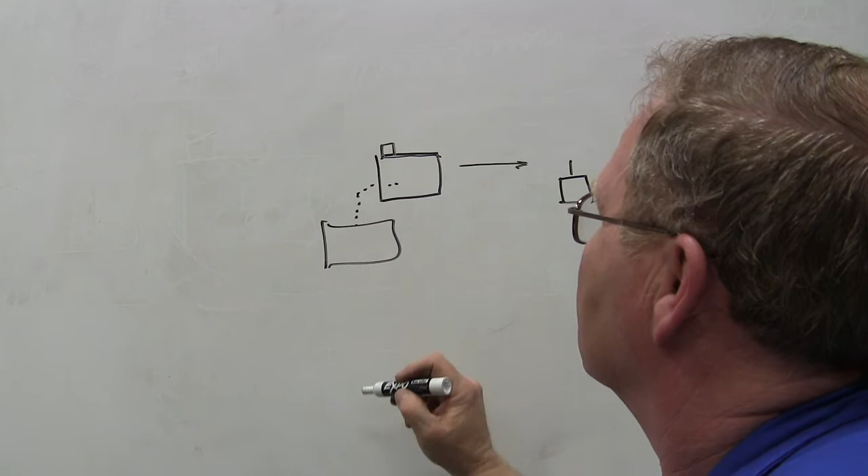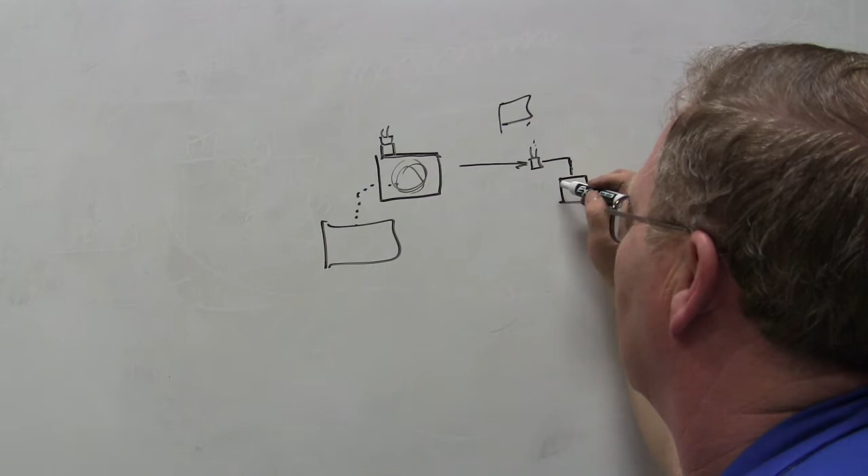In here you've got a little solenoid valve, and right here you got a little solenoid valve. And that solenoid valve, when the PCM operates it, opens it up, and usually it'll do it going tick, tick, tick, tick. It doesn't just open it up solid, it goes tick, tick, tick, tick. It's got a pulse width so it can vary the amount of purge.

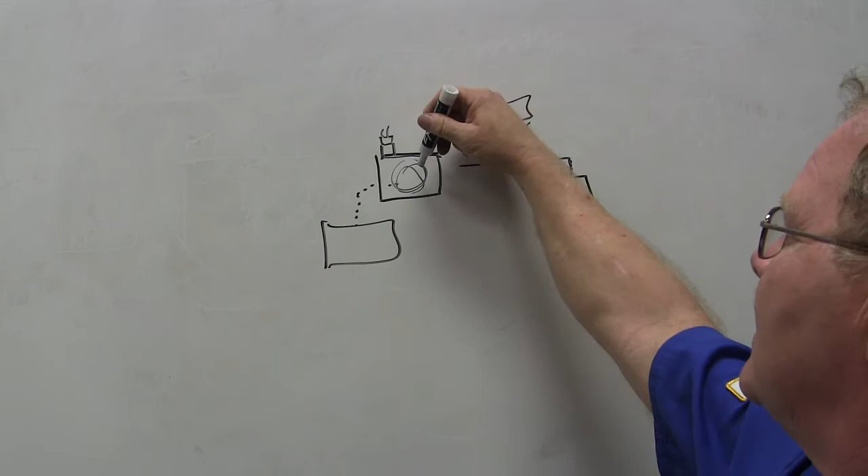It's going to pull these gasoline vapors that came through this line into the engine and process them and burn them so they never see the light of day, right? All right, now this is ultra simplified.

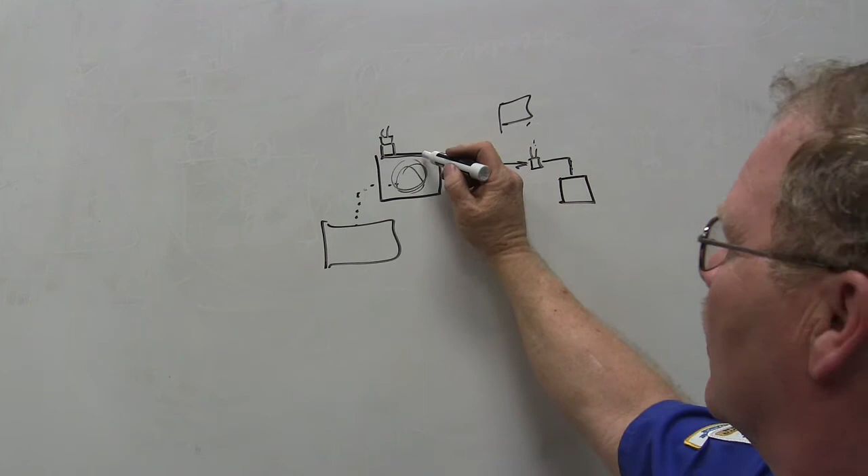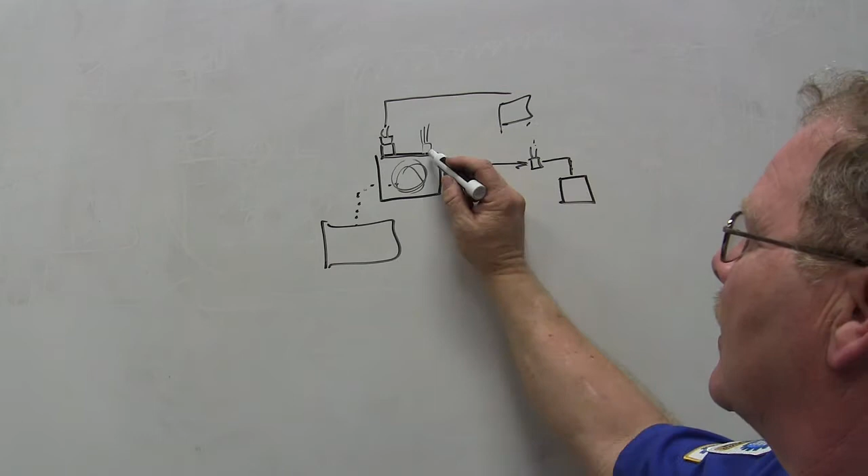Also in here we've got a pressure sensor in the gas tank. Occasionally the PCM wants to close this and reduce the pressure in the gas tank. This one's normally closed, this one's normally open. So it closes that one, opens that one, then closes that one, and it traps that little bit of vacuum in the gas tank -- it's a tiny little bit, not very much.

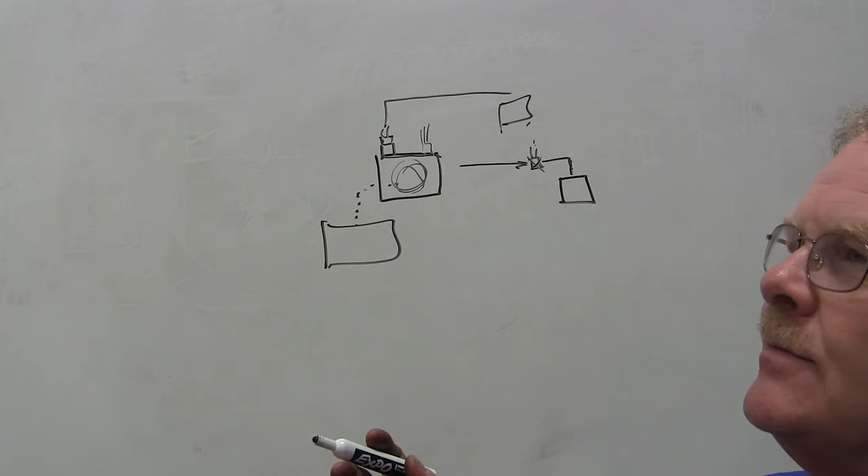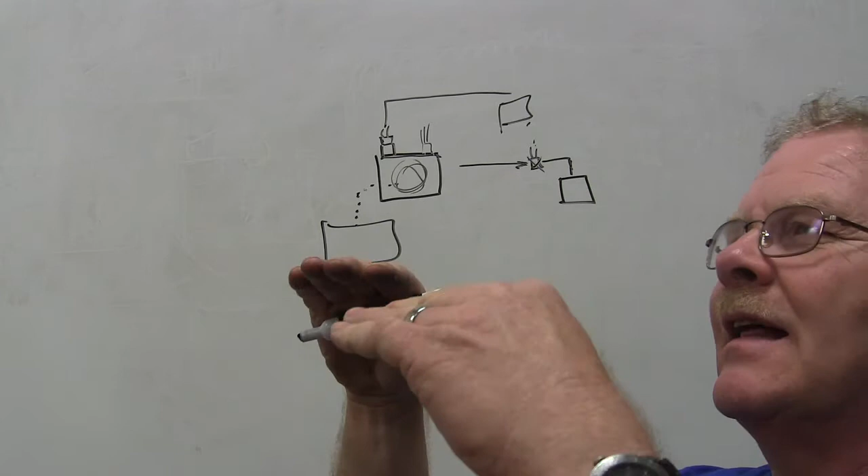It doesn't do this unless you're parked, typically. Sometimes it'll do it whenever you're between 50 and 85% gas when you're driving. Depends on the system, everybody's a little bit different. There's also natural vacuum NVLD systems that just depend on the gas cooling down to reduce the pressure in the tank and open a switch. That's a different deal. One way or another, this valve is going to be closed only when the PCM is checking to see if there's a leak.

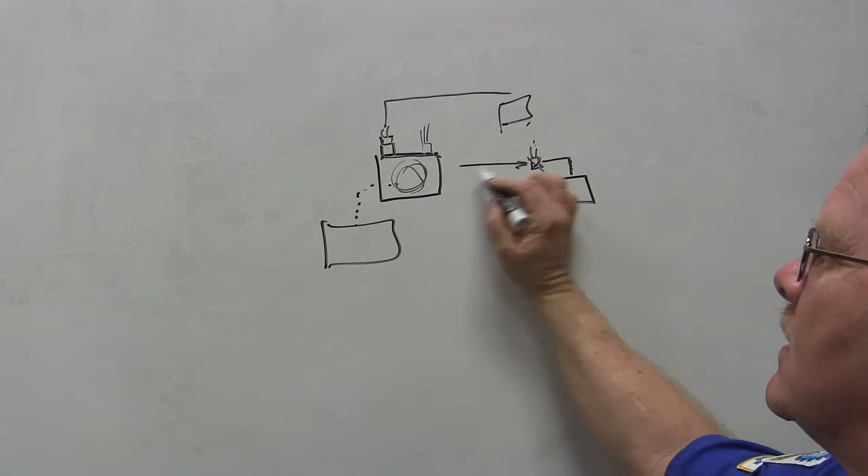All right, this pressure sensor -- let's watch this. Let's draw a graph here. What if the pressure sensor did this, and then it leveled out whenever this thing stopped?

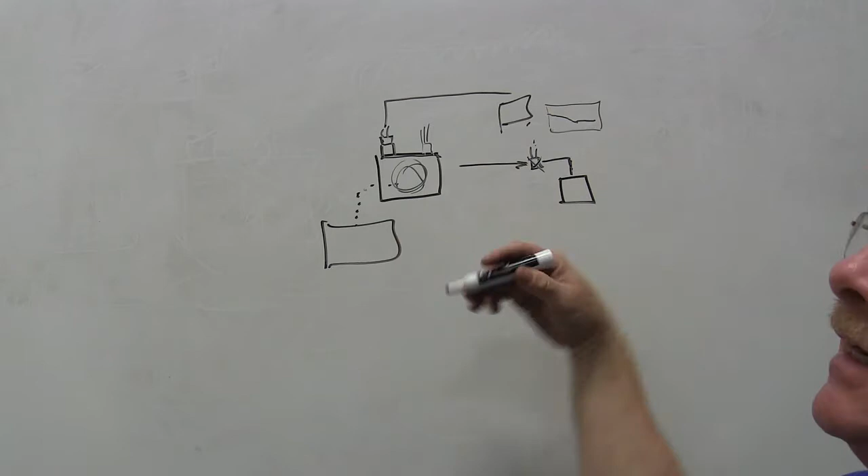Now you got leak detection pumps on some of the Chryslers and all this. There's a bunch of different ways this thing works. So we're going to assume we're doing the one with the engine running.

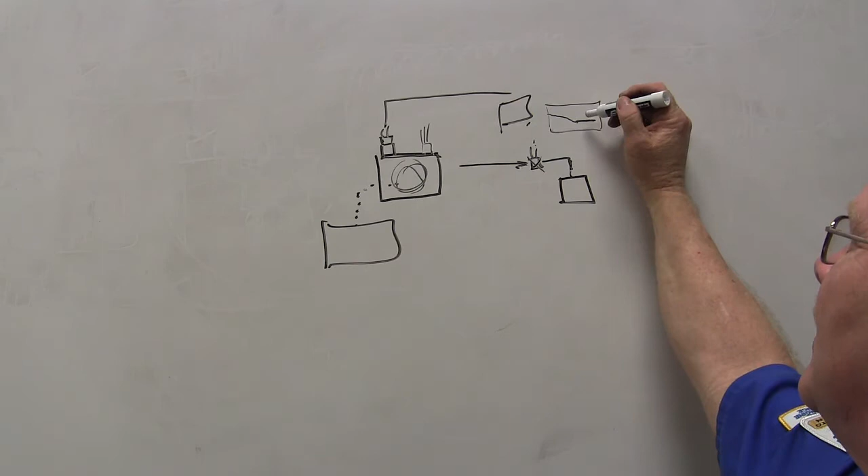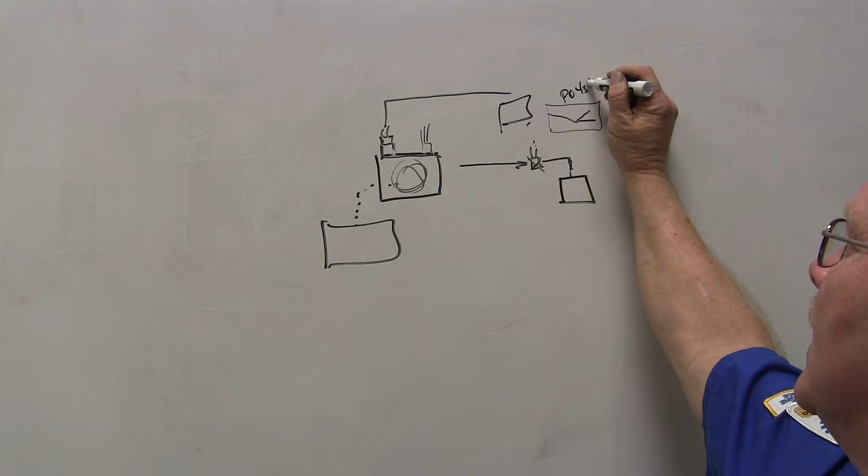All right, this right here is supposed to hold. It's not supposed to leak back up. If it leaks back up, when it's holding this, measuring that, and holding that, after it has delivered a vacuum, if it leaks back up it knows it's got a leak, and it throws you a P0455 if it's a big leak. It'll throw different codes.

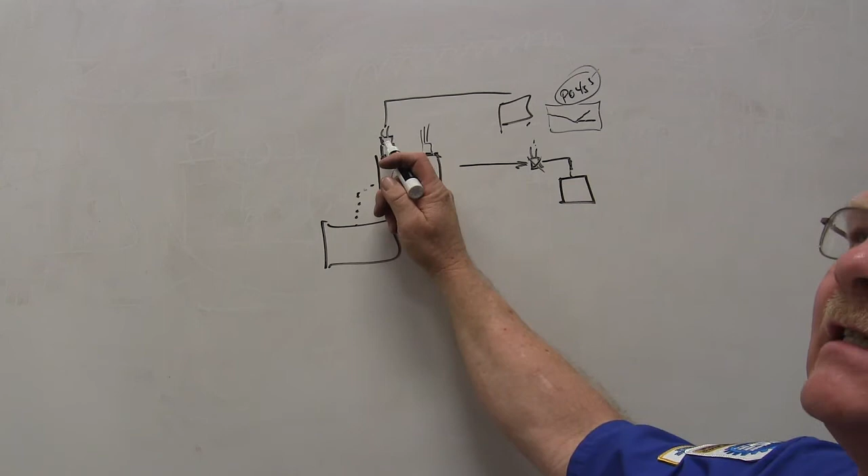Well, when it releases this, it expects it to go back up. If it doesn't, it throws you a code for that, because sometimes this gets clogged up with dust and stuff, or the canister itself might be. That's why most of your canisters nowadays have got a filter. But that vent right there, whenever air is pulling in, the air is coming in there and purging the canister. That's basically how that works.

Now, years ago, back in the way yonder, I think they started in the early 70s putting canisters on cars. I don't know exactly when it was, but the fact was I've seen them for eons, even when we had just carburetors. The old EVAP system only purged the canister when EGR was flowing. Then later on they started using a little solenoid to do that. So keep that in mind.

That's what EVAP is all about, right? Now, what is the significance of EVAP? It can cause drivability problems. We talked about that a little bit yesterday.

All of the following can increase the pressure in the evaporative system except: A, returned fuel from the fuel injection system; B, fuel temperature; C, volatility of the fuel; or D, inlet fuel to the fuel pump.

Returned fuel from the fuel injection system means you've got a fuel pressure regulator on the rail. Fuel goes up there, the excess pressure lifts that regulator off its seat, and pressure comes back to the tank.

Could that increase the pressure? Because it's going to be warmer when it goes back than it was when it went up, right? The fuel pump pushes it up there, it's kind of cool, it comes back warm, so that can increase the pressure, correct?

Okay, all right, and then what about fuel temperature? When fuel gets warmer, does it increase pressure?

Volatility of the fuel—if it's more volatile, we talked yesterday about Reid vapor pressure. If it's more volatile, is it going to be prone to increase pressure just because of the nature of it?

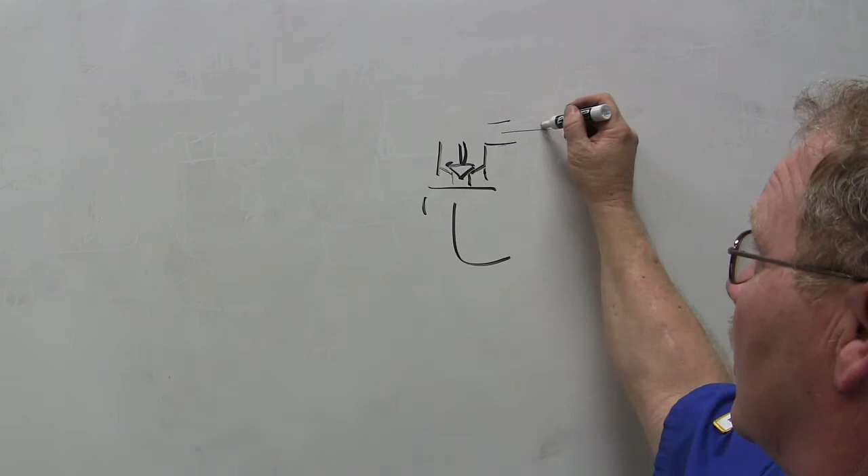Here's your EGR valve, here's the heart of it right here. You've got a seat right here, basically a hole, and you've got exhaust coming up here because you've got a pipe screwed on there, right? You have a pintle. You've got a diaphragm or a motor or whatever that opens that. When you open that, that exhaust is able to leave this pipe coming from the exhaust and go into the intake. But it's only supposed to happen when this valve is open.

Now then, you're the engineer. We need to know how we can tell if this EGR is flowing. I need to know how it's flowing, is it flowing or is it not? I don't think it is. No. How would you be able to tell? That's what I'm asking. You need a system.

You've got to design a system so that I'll know, I can hook it up to the car. In other words, I can type algorithms into my PCM. The PCM needs a feedback mechanism so it can tell if EGR is flowing or not. So how are you going to do it? A sensor? Huh, a sensor. Where are you going to put it?

Well, I know that, but what I'm trying to say is you've got to come up with a system. I'm talking about engineering. I know you've troubleshot an EGR before, yeah, but I'd say listen, underneath the EGR...

You're going underneath it. Okay, so here's our pipe right here. We got a pipe screwed onto this. I got to draw that better. All right, and that pipe, that exhaust is flowing up here.

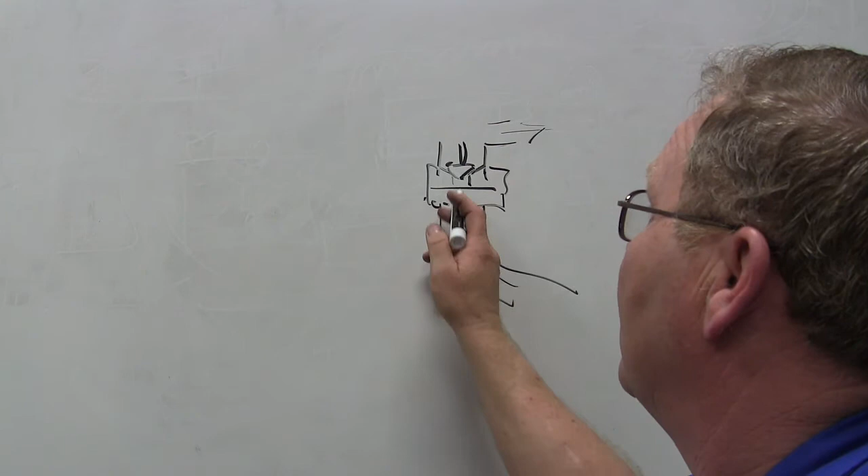So now, what are you going to have that sensor sensing? Is it oxygen, air, or the pressure coming up? Okay, so if this is closed, there's going to be pressure there all the time, isn't there? Okay, then above it. So we're measuring pressure above it.

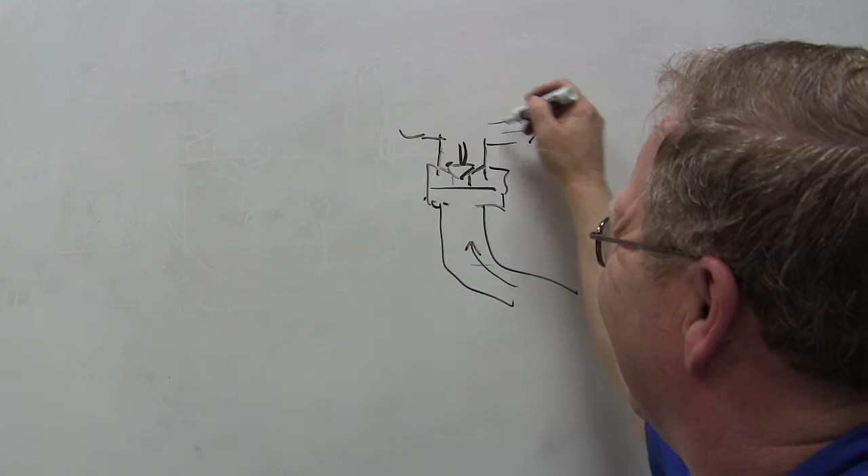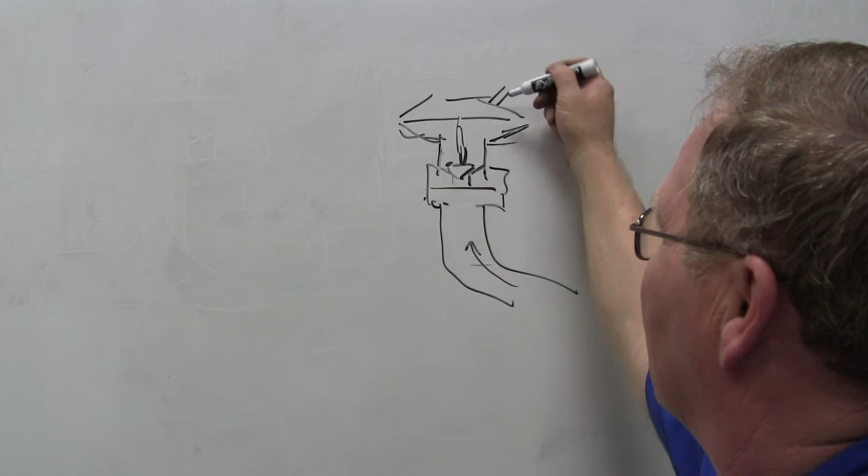So we're going to put, there's our diaphragm right there with a vacuum line hooked to it, if that's the way we're doing it. And this is going to be connected to the diaphragm. When low pressure comes in above the diaphragm, it raises the pintle off the seat. All right, so we're going to put a sensor right here, and we're going to put wires coming out of it, right? And this is going to be a sensor that reads pressure.

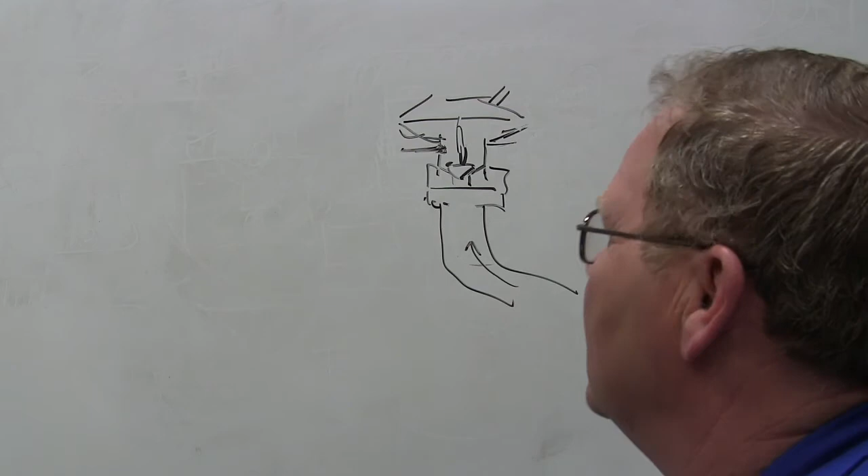We don't really have a lot of room. We can put one in there. It's got to be down here so that when the exhaust is flowing, it flows past it, right?

Now, on the Asian cars, they've done that, and what they use is a temperature sensor. So what happens, that exhaust is hot, right? So if you put a temperature sensor in here and it gets really hot, you can tell that EGR is flowing. If it doesn't get really hot, you can say, well, the EGR is not flowing, I'm going to turn on a code. I'm going to turn on a P0401.

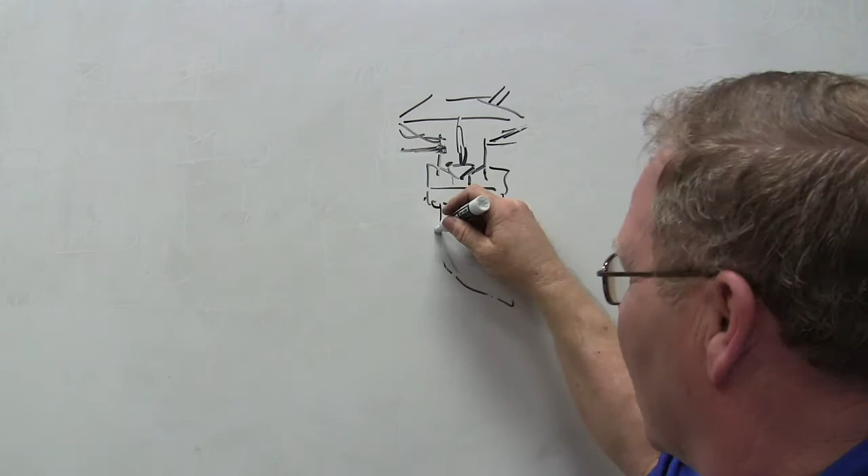Okay, now another way, I'll tell you how the Ford people do it. What about, let me ask you this. What does your oxygen sensor do when EGR is flowing? Wouldn't that be a good feedback? Is it going to change?

If you're watching that oxygen sensor real close, if you're the PCM, you're watching the oxygen sensor and say, I'm going to deliver a little EGR. I'm going to raise that pintle. I'm going to deliver some vacuum. I'm going to raise it up. And I'll be able to look at that oxygen sensor and tell if that thing's flowing. So what's the oxygen sensor sniffing?

Oxygen. You won't have as much oxygen, will you? Because you're displacing some of it with this inert gas. So you're going to probably see it drift up a little bit. I'm surmising. GM did that for years.

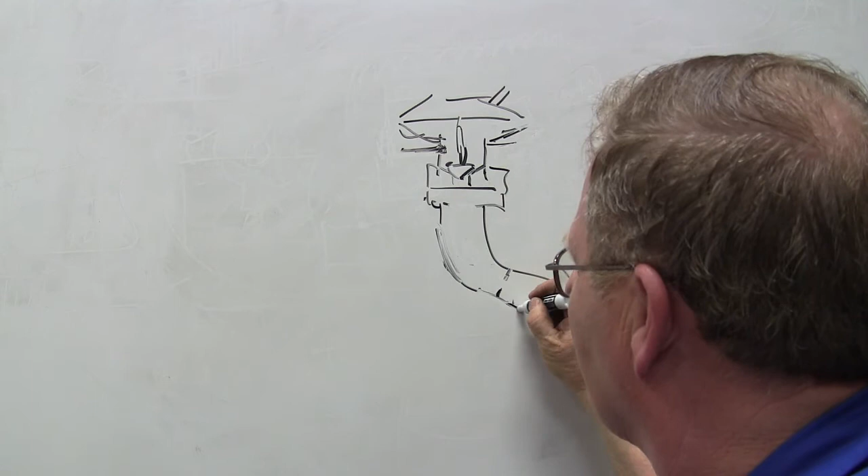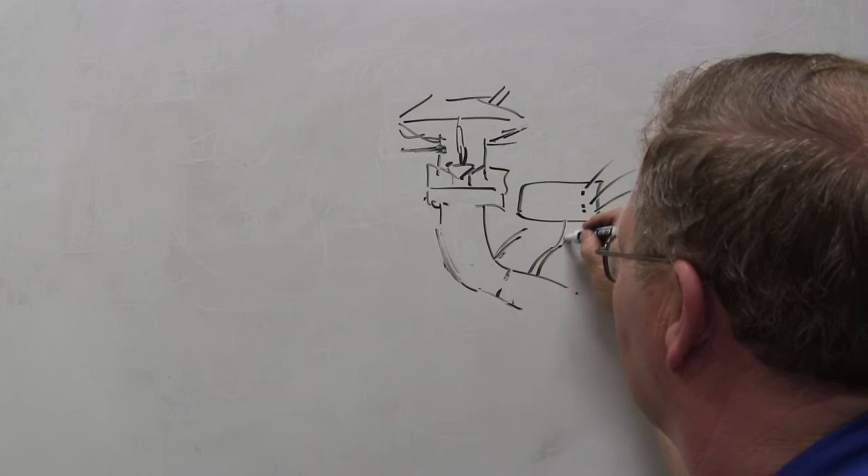All right, but Ford did this. Here's what Ford did. Ford took and put a little restrictor right here. And they put a hose right here and a hose right here going to a sensor with 3 wires to it: reference voltage, signal, and signal return. These hoses were 2 different sizes.

All right, when exhaust is flowing in this tube, what does the pressure here in front of this orifice do? Imagine yourself with 2 gauges connected to it. What does the pressure on this side of the orifice do? The engine is pushing exhaust up this way. What do you think it's going to do?

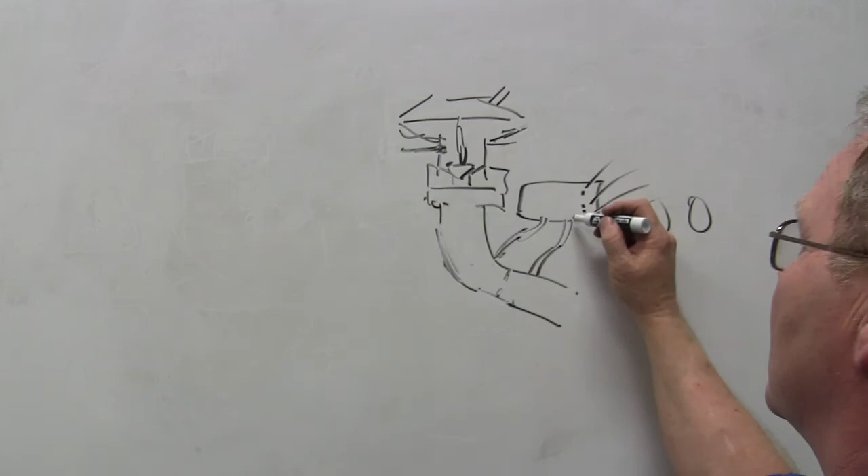What happens when you put your finger over the end of the hose? The hose gets tight, right? Okay, so this pressure on this side is going to go up, and the pressure beyond the orifice is going to go down. They call that a DPFE, delta pressure feedback EGR.

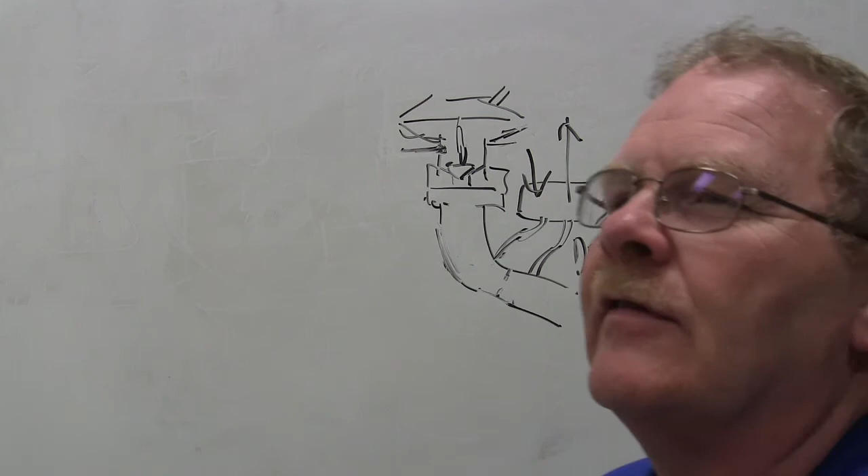If it doesn't see that change, it knows there's no exhaust flowing. If the passages are stopped up in the intake with crud, which a lot of the times they will be, then you won't have any kind of EGR flowing through there.

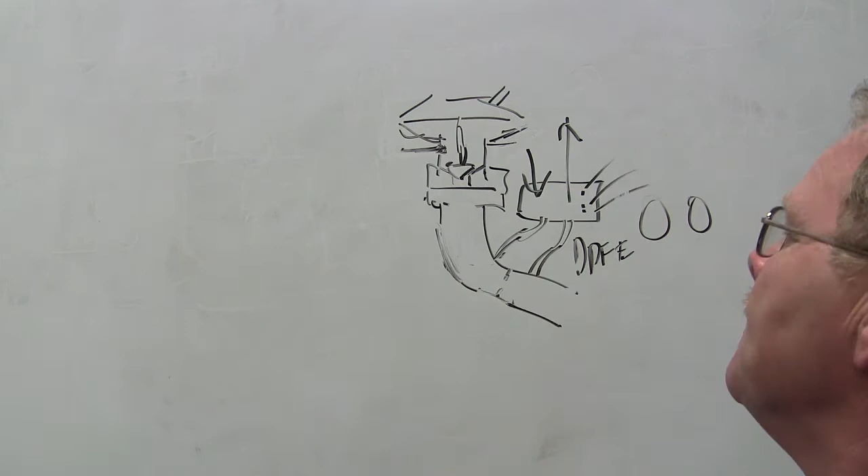All right, here's another thing that we like to do. Let's get rid of that right there. And get rid of that. We're just going to have an open pipe.

All right, some of them, well, like the Bronco out there, it's got a linear potentiometer on top of it. And it's got a little thing sitting on top of that EGR valve, and it's got VREF, and it's got signal return, just like all the rest of them.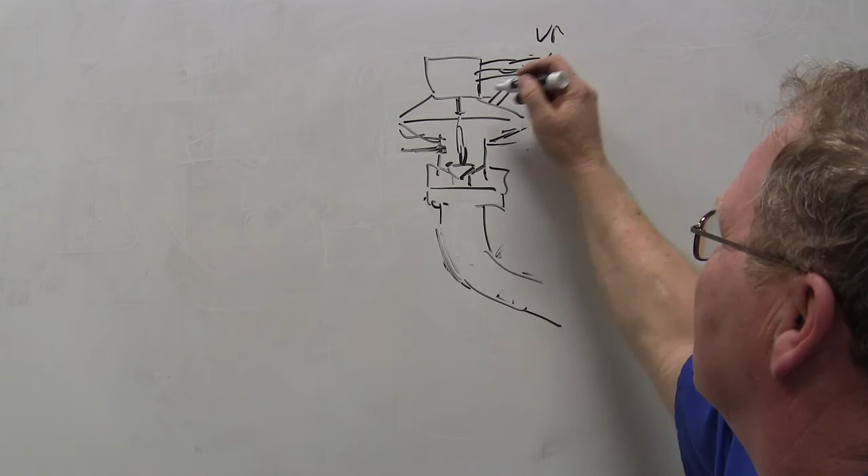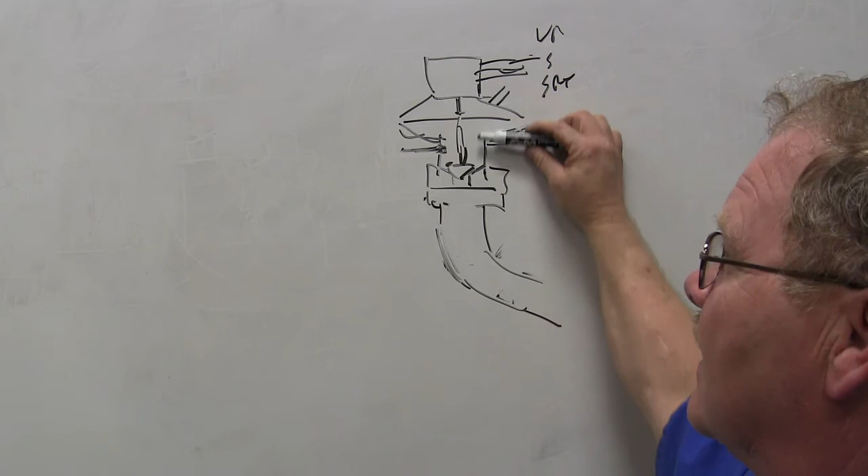It reads about 0.4 of a volt when EGR is not flowing. And as this raises up, that voltage goes up, and it knows that it's raising that. It's got a feedback mechanism telling it how much it has opened the EGR, but it still doesn't know if it's flowing.

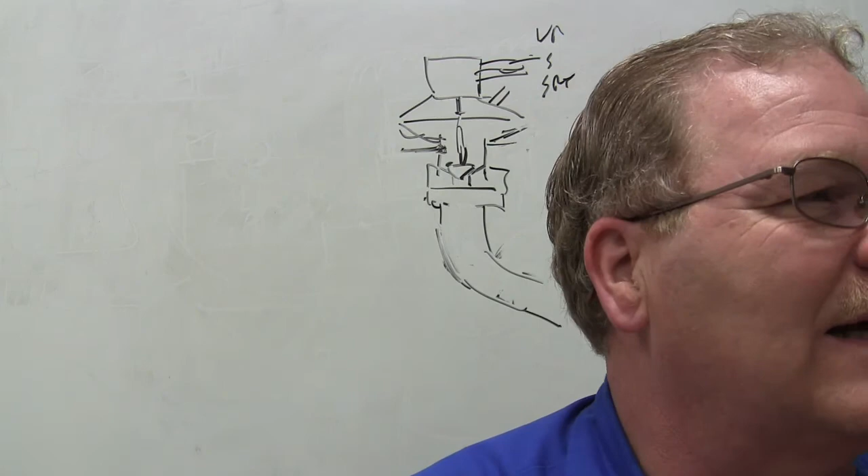You see what I'm saying? This is what engineering is all about. These people have got to determine what's the best way that we can tell if EGR is flowing or not, so that the PCM can decide to throw a code or do whatever, or maybe open it a little more. The most common problem you have with EGR is it actually clogs up the ports that this stuff flows through, because PCV steam condenses and turns into tar in the intake and all that hogwash. So I wanted to burn that in.

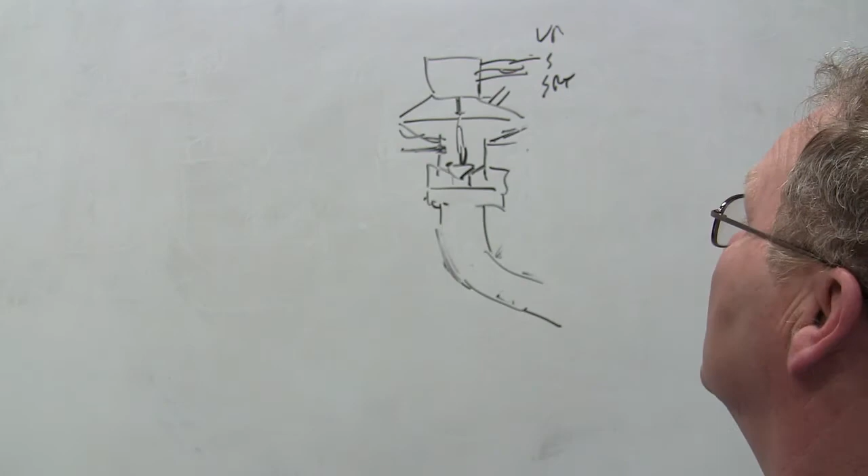There is a worksheet that I gave out on EGR system familiarization and emissions. You remember seeing that? Everybody should still have it. If you don't still have it, woe is you. You need to come up with that. EGR is extremely important. Okay, let's keep going.

Some of them don't have it because they don't need it. Some of them don't have it because they close the exhaust valve early whenever they're wanting to trap some exhaust gas - that's variable valve timing on the exhaust camshaft used for that.

Okay, what are you controlling with EGR? What have we been saying, y'all? What does EGR control? Exhaust gas? EGR is used to control which exhaust emission? Come on, yeah. CO2? NOx. NOx. I can't believe you guys didn't remember that. I just hammered on it a while ago. Oxygen and nitrogen hooking together.

A typical EGR pintle position sensor, which I just drew one up here, is what type of sensor? What did I say? What did I say? Potentiometer. Linear potentiometer. OBD2 regulations require the EGR system be tested.

Technician A says PCM can monitor the commanded position. Technician B says PCM can open the EGR valve and monitor it for a change in map sensor reading. That's another way - the pressure in the intake is going to rise when EGR starts to flow. So that's going to be C.